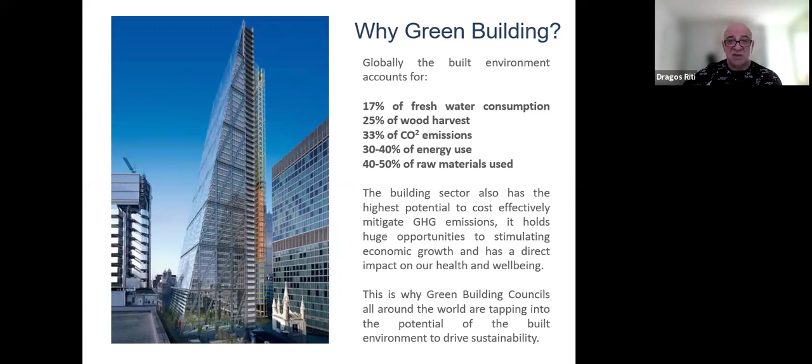So the learning objectives of this course, I was saying just before, is to establish the relationship between the demands of sustainability and the resource we are using in construction. This is what is really needed to build something in a way that we can have a sustainable building.

A sustainable building meaning less CO2 emissions, a building that can use free energy or green energy, and also a building that can recycle water, but also a building that is built in a manner that it can hold thermal energy, not losing due to the construction techniques energy outside of the building.

Also, we will be looking at understanding the environmental impact of materials used in construction. In order to have materials to use in construction, we need to take raw materials from the lithosphere, and that creates an impact on the environment. But not only that—at the end of the construction cycle there's also a lot of materials or debris that are thrown back into the environment.

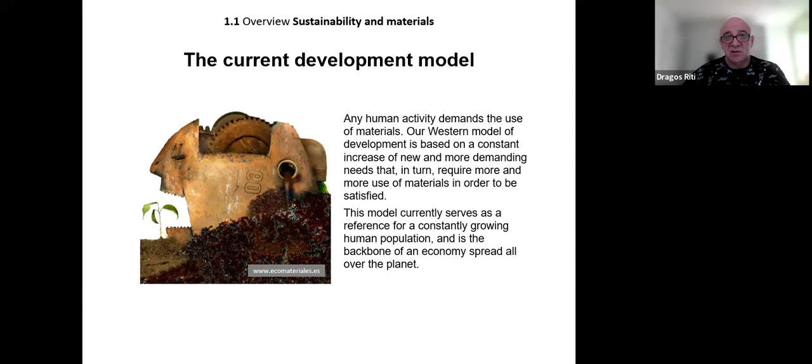We're all aware of part of this. The problem with the current model is that materials are extracted from nature, causing environmental impacts associated with this extraction, and that diminishes the reserves. We don't have too many reserves left for the next 20, 30, or 50 years. And once the use of products has been exhausted—after using a cell phone for 5 years or 2 years or 7 years—the materials return to the environment as waste, often causing serious contamination problems. This procedure works against a long-term development model. Therefore, it is necessary to create a model that is sustainable.

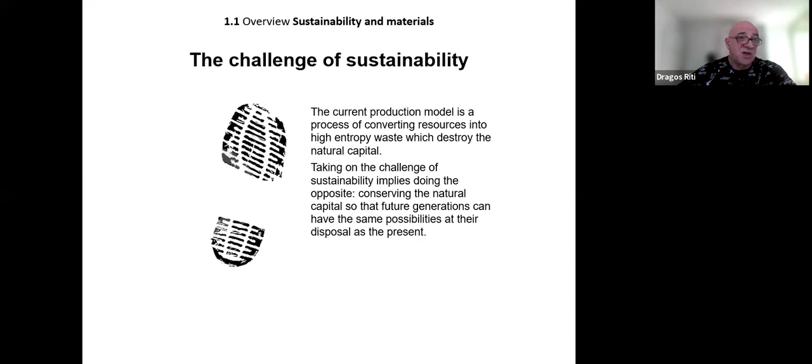The question is, how can we do that? Where is the place we can change something or do something different? This is the challenge of sustainability. The current production model is a process of converting resources into high entropy waste, which destroys the natural capital. Taking on the challenge of sustainability implies doing exactly the opposite: conserving the natural capital so the next generation can have the same possibilities at their disposal as we have now in the present.

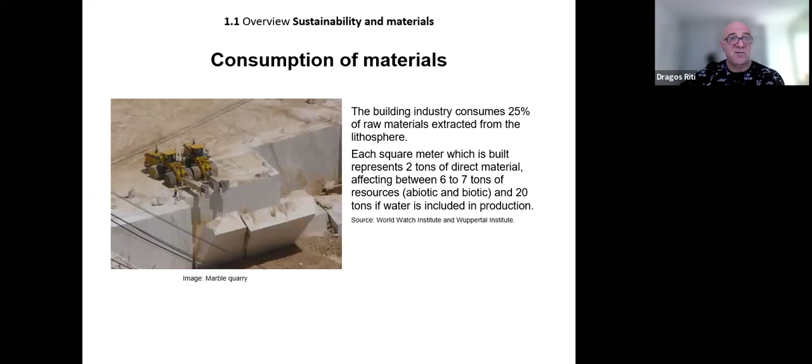And if you think about it, this is huge. The construction industry is also generating waste, and construction waste usually makes up around 33% of the total amount generated by society. We're accountable for 5.2 tons per person per year, and domestic waste is up to 8.5%—that's 1.3 tons per year per person.

On average, 60% of construction waste is recycled, which is quite a high number compared to 20% of domestic waste. Basically, we're not recycling our waste, but only a very, very small portion.

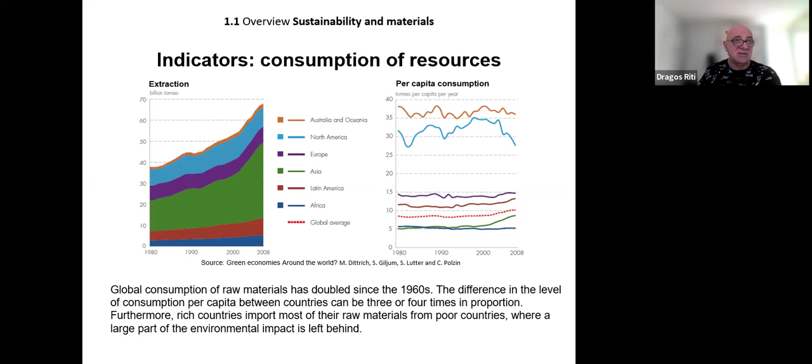Poor countries do not really have policies to protect the environment, and they're also in need of money to make their economy grow. So the environment is one of the last things that they're looking at.

Now, talking about resources and materials—I don't know if you know, but a few years ago there was this discussion that we would come to a point of no return, in the sense that we are using more resources from the lithosphere than the lithosphere can naturally regenerate.

So the raw material reserves pose limitation to the use of materials and the quantities which can be used. Unfortunately, we're not aware, or not really conscious, that each action we're doing - when we're buying construction materials, when we're building something - has an impact on the lithosphere.

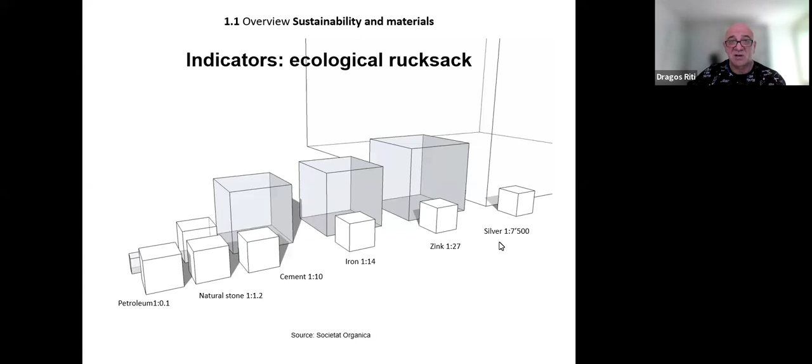The ecological backpack represents the raw materials necessary to manufacture a certain amount of material or product. I was giving the example of mobile phones - a mobile phone weighing 150 grams can have an ecological backpack of up to 75 kilograms. And a 6 kilo computer can have something like 1.5 tons of raw materials in order to have it in our home. Here you have some other examples of the ecological backpack.

Aluminum is 1 to 6. Steel is 1 to 15. And you'll see that in order to get 1 gram of gold, you will need 350,000 grams of raw materials to have it in place.

There's also associated with the extraction of raw materials, in order to convert them into finished products or finished materials, a number of technologies, but also a number of substances used in order to put these things together, and this is providing a toxic environment. So we're poisoning, in a way, the lithosphere by extracting or producing final products.

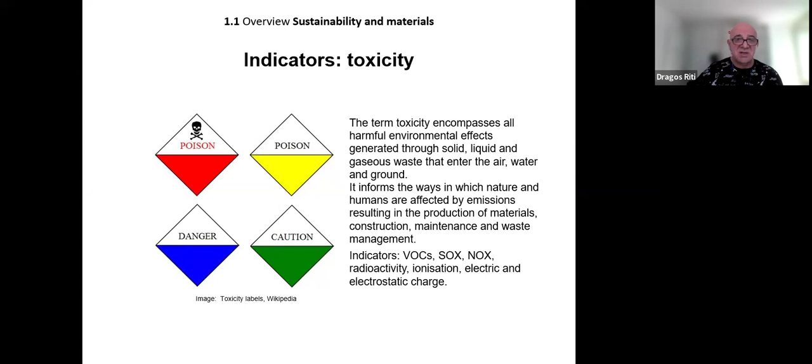These indicators are volatile organic compounds, and some others are radioactivity, ionization, electric and electrostatic charge. And also, by mining and manufacturing final products used in the construction industry, we are producing gases, carbon dioxide.

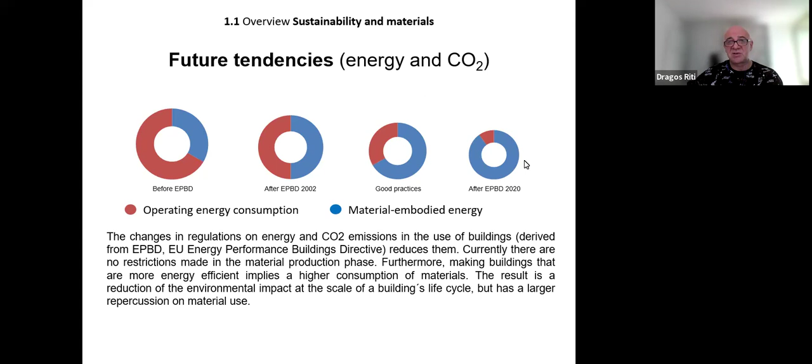So how do we look at the building? A building is put together, of course, using materials, but it's not only the materials that are accountable for how to build a building, or the extraction of materials, or the energy needed to provide these materials. It's also the philosophy and the concept on how we are building today. So what we need is a holistic vision on this construction industry.

We need to look at materials and building systems, how we design them, how we put them together. We need to look also at the industrial system. We need to look also at the commercial system, how we are selling the buildings and what we're putting in the building. And of course, when we have the building ready, we need to have a smarter management of sustainable building. And that implies touching several aspects of the industry.

The first one is a redesign of the materials that we're using in the construction industry. That means we need to minimize the quantities, really using what's really necessary, to find solutions which have a low impact on the environment, and to try to use a standardized way of building. That means dry and retrievable joints. And of course, to look at the end of the life cycle of the building, how can we recycle material, or how we can tap into renewable options.

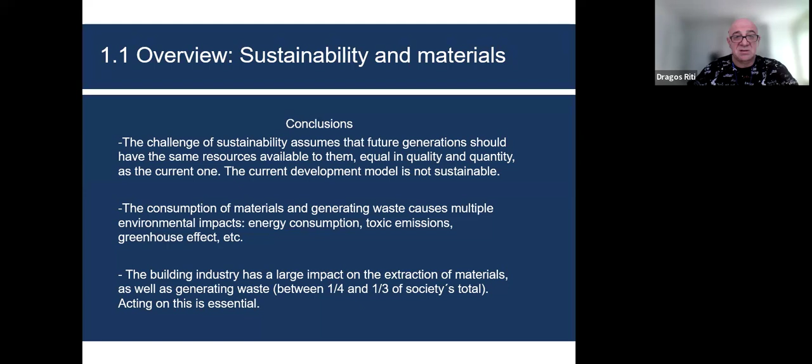Acting on this means finding ways of using a different development model for the construction industry. Looking back in history, we can examine the 20th and 21st century industry models.

The 20th century model was an open materials cycle, meaning extracting resources from the earth in a linear sequence: extracting, providing, manufacturing these materials, using them, and then they become waste. This is an open cycle.

This model has been largely used in the 20th century and is still used now. The more we find ways of closing this cycle, the more we can move towards an industrial ecology, inspired by the great biospheric recycling machine, which proposes closed material cycles. This is where 21st century society is aiming to go: recycling, manufacturing, using, and then recycling again. This is the closed materials cycle.

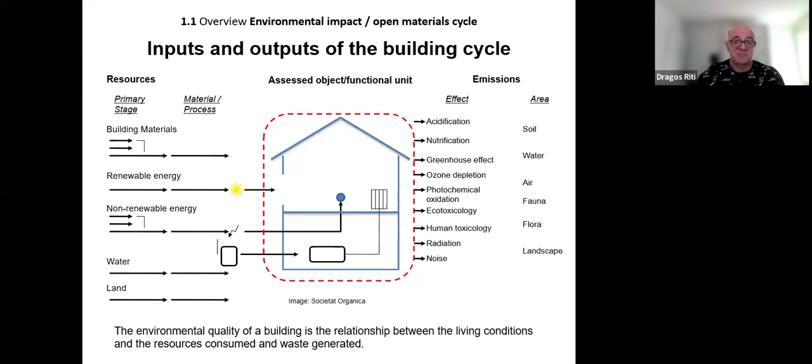The environmental quality of a building is the relationship between living conditions and the resources consumed and waste generated. So the quality of your living quarters is determined by the resources consumed and the waste this has generated.

In order to look sustainably at the way of building and construction energy, we need to tap into this concept called the life cycle of a building, the life cycle analysis. This chart shows this concept about input and output.

What we use as input are resources and energy. Using those, we need a lot of other things connected to energy and resources: we need to obtain materials and send them to industrial production, then distribute and sell them, and put them into use and operation. At the end of the life cycle, we have waste, a final disposal.

What do we do with this waste? We can recycle it or just dump it. At the end of the day, going throughout this whole life cycle, we have waste and emissions. Each stage of this journey—obtaining materials, manufacturing them, transporting them, putting them in use, and transforming them into waste—has an effect on the environment, coming from waste and emissions.

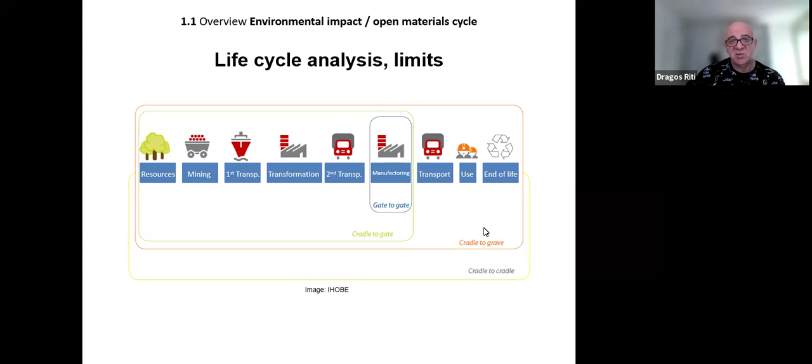In order to compare the results of two or more life cycles, the objectives, definition, and environmental inventories, the phases that we're considering, the limits of the system, the functional units must be the same when we're doing life cycle analysis. You will see further on how we can look at this kind of analysis of the life cycle of the material. So we need to define the goal and the scope of the materials.

It's also important to make an inventory, an analysis of the necessary materials that we are using, and not only materials, but also procedures, techniques, and systems, and also to see what is the impact, to be able to make an assessment of the impact that all these things we're using have on the environment.

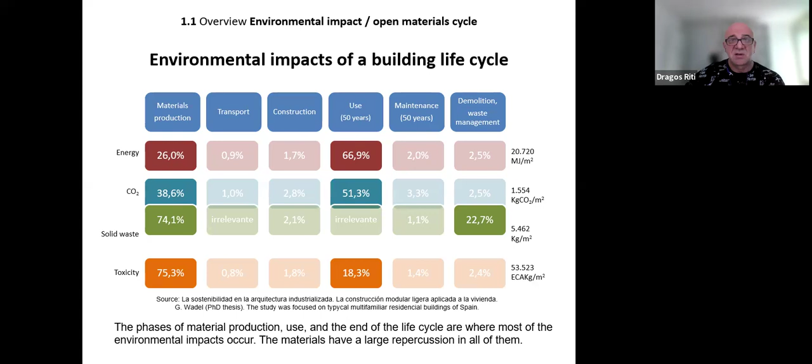The materials have a large repercussion in all of them. So where we really need to look in order to have a lower impact on the environment is during the materials production phase and also in the use of the building. And in order to do that, we need to look at how we're using materials and what kind of materials we're using.

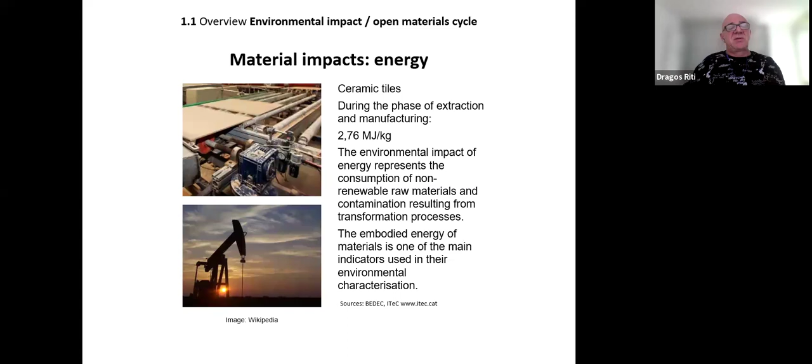So now, talking about the impact that materials have, we mentioned before the consumption of energy, water used, landfill. Here we have an example to give an idea of how this impacts the environment.

We're taking ceramic tiles as an example. Everybody uses ceramic tiles in their homes, and after a few years they're no longer in line with fashion, so we dump them, break them, and put in new ones. A ceramic tile, during the extraction and manufacturing phase, uses 2.76 megajoules per kilogram of material. The environmental impact of energy represents the consumption of non-renewable raw materials and the contamination resulting from the transformation process. The embodied energy of materials is one of the main indicators used in their environmental characterization, and that's what we want to talk about.

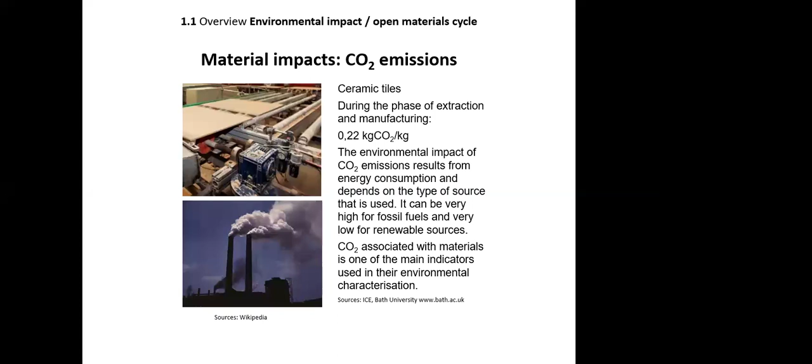Also, some other impacts include the emissions of carbon dioxide. Keeping the same example, ceramic tiles, during the extraction and manufacturing phase, release 0.22 kilograms of CO2 per kilogram of material into the atmosphere. The environmental impact of CO2 emissions results from energy consumption and depends on the type of source used; it can be very high for fossil fuels and very low for renewable energy. So depending on what kind of energy we use to manufacture these tiles, this has a lower or higher impact on the environment. CO2 associated with materials is one of the main indicators used in their environmental characterization.

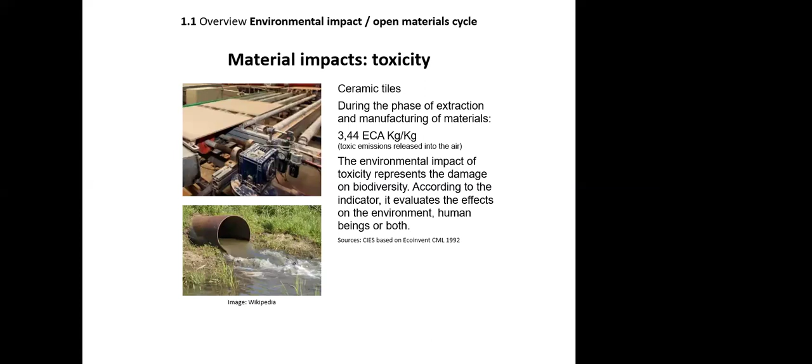Also, a big impact on the environment is toxicity. Again with the ceramic tiles, during extraction and manufacturing we have 3.44 ECA, which accounts for toxic emissions released in the air, so 3.44 ECA kilograms of emissions for a kilogram of finished product. The environmental impact of toxicity represents damage on biodiversity, and the indicator evaluates effects on the environment, on human beings, or both.

Of course, there are other impacts on the environment. Again with ceramic tiles, apart from energy, CO2, solid waste and toxicity, extraction and manufacturing of materials also cause water and earth acidification, ozone layer depletion, land erosion, eutrophication, acid rain, heavy metals pollution, land occupancy, and many more.

So what is the place and the scale? Here you can see the impact of the materials. The environmental impact of a specific material is closely linked to the rest of the building materials, which in turn form an important part of impacts throughout a building's life cycle.

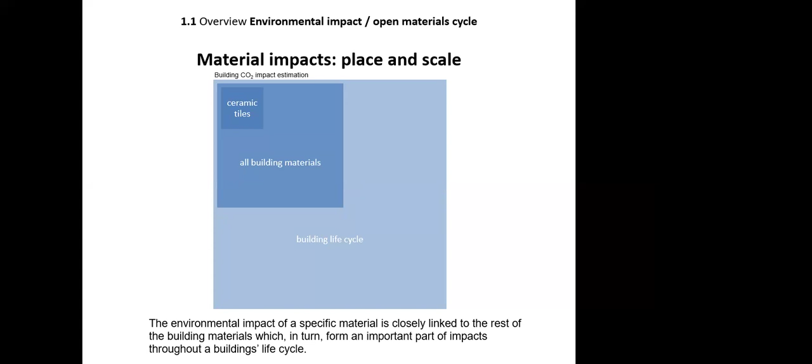So what are the conclusions of this short overview? The open material cycles, the extraction of resources, generating waste, are the causes of the environmental impacts of building products. These impacts arise from the extraction of raw materials, industrial processes of transformation, manufacturing, transportation, building maintenance, and disposal at the end of its lifespan. There are materials managed in an open cycle whose impacts can be smaller because they contain some environmental improvements, but they are a palliative, not a solution. The underlying problem remains.

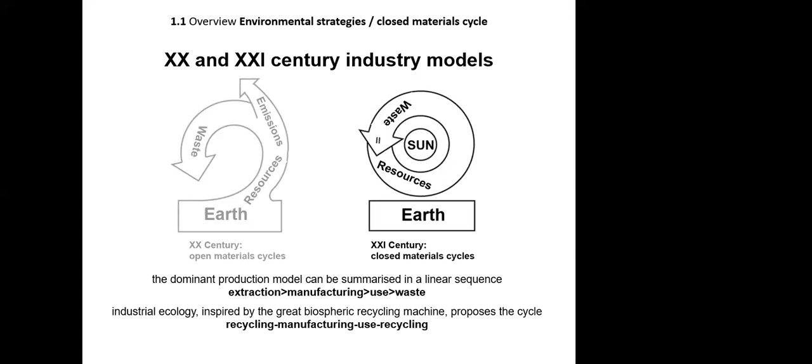Now, having been through the open material cycle, let's look at the closed material cycle and see the difference and what impact it has on the environment, if any. The dominant production model of the 20th century was extract, manufacture, use, waste. What we're looking at now in the 21st century is moving towards industrial ecology, inspired by the Great Biospheric Recycling Machine, which proposes recycling, manufacturing, use, and recycling again.

So we're looking at strategies to reduce impact on the environment in construction. There are 5 steps which are important milestones. The first is reduction of demand: it's important to look at how much we really need, and for that we need to optimize material use and reduce quantities per unit of service.

Also, when looking at materials, we need to try to increase efficiency, selecting materials with the same characteristics but lower impact on the environment. For that, we also need to look locally, use local resources, and build by reusing materials closer to the construction site, not bringing materials from hundreds or thousands of kilometers away.

And of course, a big and hot topic today is the recycling or renewal of materials: using recycled industrial materials or renewable natural materials. That would help a lot to significantly reduce the impact on the environment. We also need to look at impact neutralization or compensation, by choosing products that compensate their own impacts, known as carbon neutral. These are the 5 strategies we can use to have a lower impact on the environment.

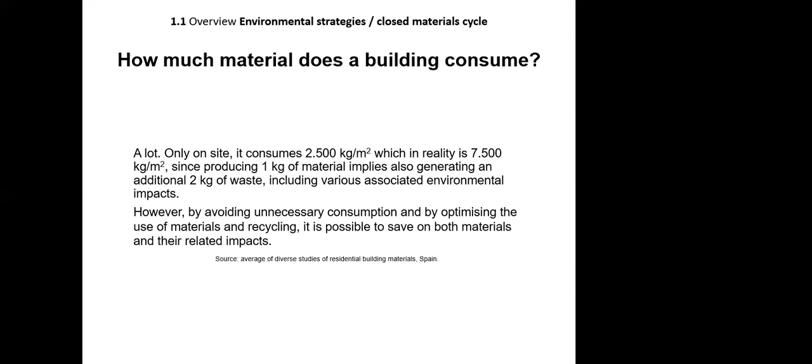Again, how much material does a building consume? Like we said at the beginning, a lot. Only on site, it consumes 2.5 tons per square meter built, which in reality is 7.5 tons, since producing a kilogram of materials also implies generating an additional 2 kilograms of waste, including various associated environmental impacts. However, by avoiding unnecessary consumption and optimizing the use of materials and recycling, it is possible to save on both materials and their related impacts. This is, in my opinion, one of the best examples: the demand reduction.

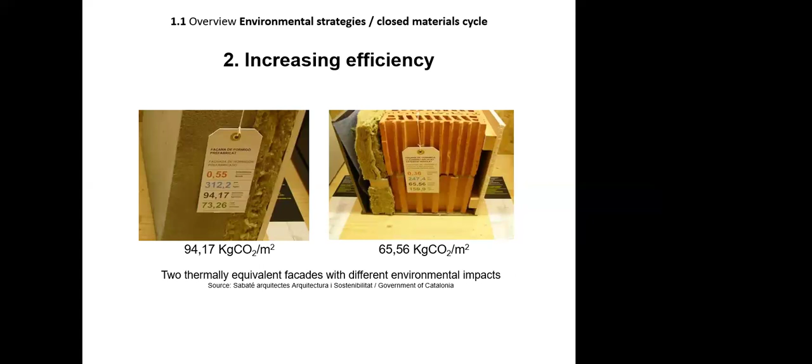So the understanding, the vision of the designer, and the knowledge of the designer can, from the beginning of the development of a building, have a significant and lower impact on the environment. I think this is a must—to have architects with that kind of vision.

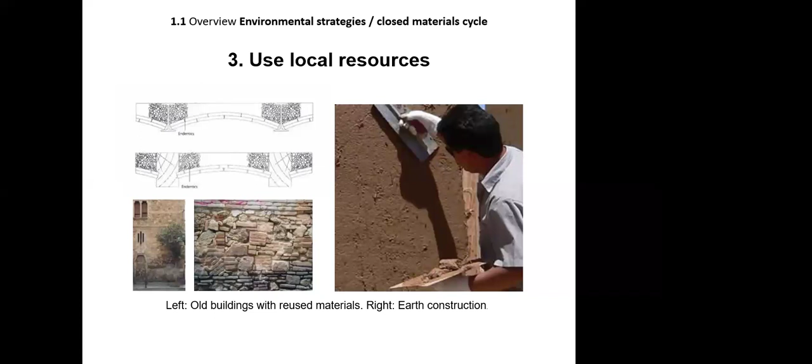We also need to look at how we use local resources, using available materials on site rather than bringing them from far away or paying for expensive materials. We can use local resources like wood, stone, or even earth. Here you have an example of old buildings refurbished with reused materials on the left, and on the right, an earth construction building.

Recycling and renewal - this is important. We're talking about recycling when using industrial materials such as iron. Here's how we look at iron: we use raw materials - iron ore, limestone, coal - which go through a process of preparation at sinter plants and coke ovens, then to iron making using an integrated steel making process with a blast furnace or basic oxygen furnace.

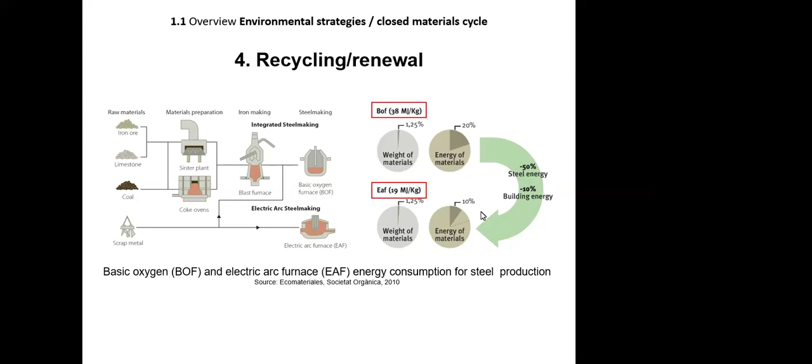So how can we recycle materials? How can we look at recycling materials? I mentioned before there are two kinds of recyclable materials: the infra-recyclable and the 100% recyclable materials. Here's an example of two: the infra-recycling material, which is concrete - we can transform it into aggregate for blocks instead of using natural stone. You can use approximately 30 to 40% crushed concrete instead of stone, mixed with cement, to make concrete.

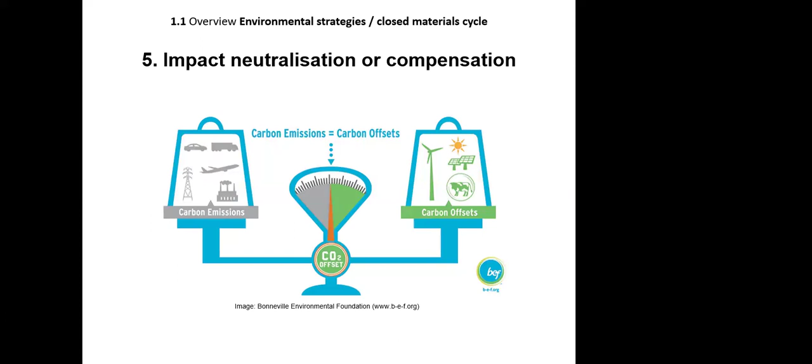An example of a 100% recyclable material is aluminum, which can be transformed into new aluminum for frames by recycling. We're also talking about impact neutralization or compensation. How can we compensate or neutralize CO2 emissions? By using biofuel, photovoltaic panels, or wind energy. In this way, we can offset carbon emissions.

What are the actions to minimize material impact? We need to decrease the demand, and we can do that through the design of a building that decreases material demand. Going back to design - architects, designers, structural designers, equipment designers - they are the gateway toward this lower impact on the environment.

Design of a building that decreases the generation of waste. For that, a designer can design a building with joints that allow it to be deconstructed instead of being dismantled or demolished, and reused in different places or ways. Design of a building that can be deconstructed, reused, and recycled - I was just talking about that.

Have an efficient user manual for the building. This is so important because during the lifetime and usage of the building, we need to operate and maintain it.

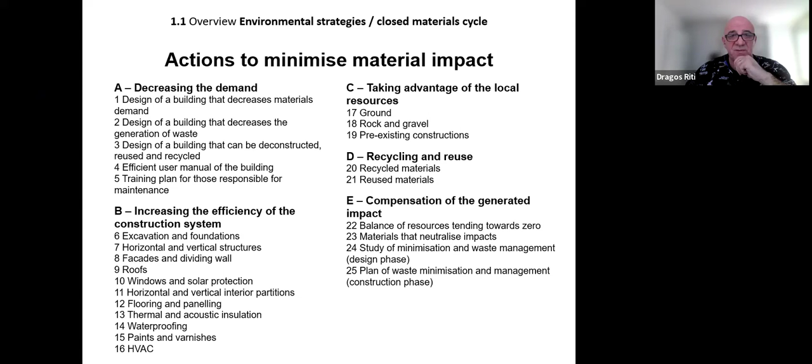Or we can use industrially manufactured structures, already prefabricated, brought to the site. We have a lighter structure using recycled or renewable materials instead of building on-site elements or joints. We can have them prefabricated and transported to site and just assembled. Also, using double functioning walls, structure and envelope, and using recycled or renewable materials can help in this respect.

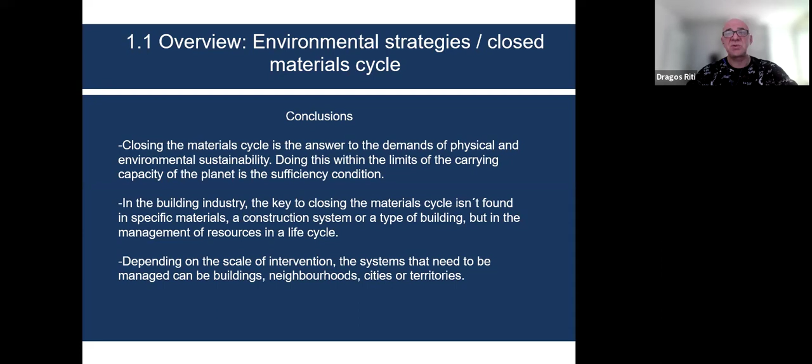Now we will go into a different section, which might be of interest for you or might not, and we will look into rating tools. I'm sure you know about those rating tools, most common in building and construction industry. We're talking about the green labels that we can obtain based on an assessment done by a third party, which gives us the sustainability image of a building. But there are also other rating tools. We will go briefly through them.

So we will start from materials. What are the requirements for sustainable materials? We need to look at the checklist, and the first things to look at are low primary energy and low primary emissions. That means natural production, and that means recycled materials.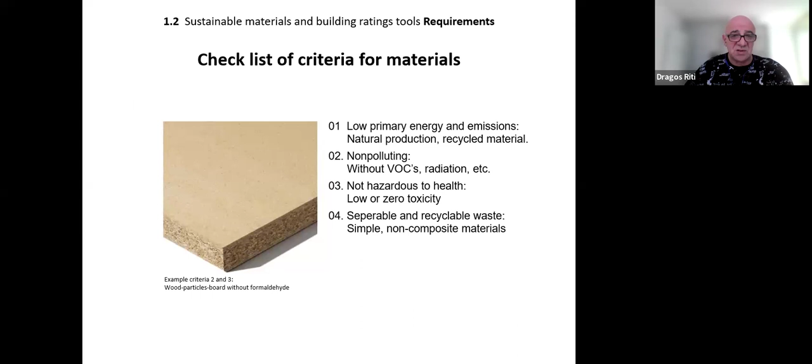Another criteria would be that the material should be non-polluting, without volatile organic compounds, without emission of radiation, gases, etc. Materials that are not hazardous to health, which have low or, if possible, zero toxicity. And another criteria, which I mentioned several times, is separable and recyclable waste, simple and non-composite materials. Here in this picture, you have an example of wood particle boards which are assembled without formaldehyde, a chemical highly and extensively used to produce wood particle boards.

Another criteria is to look at the product when we buy it, if it comes with environmental certification — this is the Eco Label 1 to 3. If we can use materials with removable joints that can be dismantled, dry assembled, or deconstructed. Also looking at materials which are made with recycled materials and have residue that can serve as raw material for other materials to be recycled. And of course, materials, joints or systems that can be reusable, have a long lifespan, and can be modular.

Another criteria is to save energy when producing and using the materials through inertia or thermal insulation, and of course saving water. We can do that by collecting rainwater and reusing it in different ways with the help of different systems for toilets, gray water, or for soil percolation, irrigation, or other things.

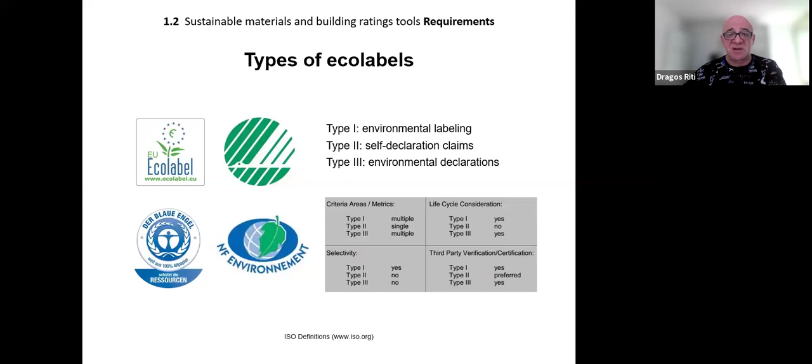Type 1 and type 3 have third-party verification certification. Type 2 is more of a self-declaration certification claim.

You have here another example: this is the EU Type 1 Eco Label. When developing EU Eco Label criteria for products, the focus is on the stages where the product has the highest environmental impact, and this can differ from one product to the other. If we look at textiles, for example, fabrics have strong environmental impact when they are dyed, printed, and bleached. For this reason, experts have come up with criteria for textiles to make sure harm at the manufacturing stage is reduced as much as possible.

For each individual material, environmental requirements can be determined that ensure low environmental impact during manufacturing, but also throughout its life cycle.

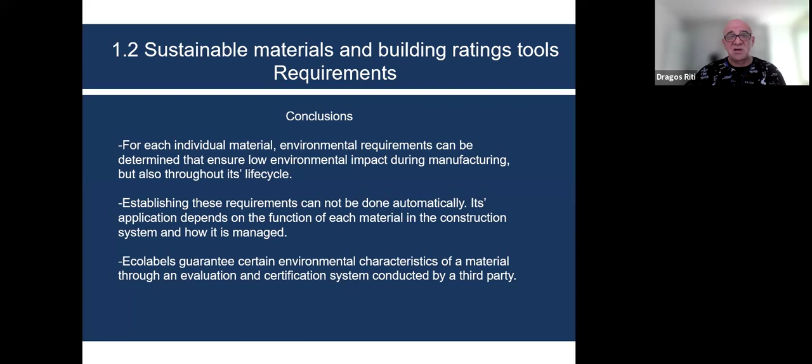Establishing these requirements cannot be done automatically. Its application depends on the function of each material in the construction system and how it is managed. Eco labels guarantee a certain environmental characteristic of a material through an evaluation and certification system conducted by a third party. But an eco label does not give you everything. It certainly helps, but we need to do more than only buying products with an eco label.

What would be the first steps? What to do? It's the initial characterization of the materials, and we need to look at the origin and the type of raw materials, the manufacturing process that is used, the differences with respect to the alternative. So what alternative can we use for this kind of material or product?

Also, another place to look at is how can we define an equivalent functional unit. That means determining the surface area, the building envelope, etc., with defined performance characteristics. What do we want to achieve, in other words?

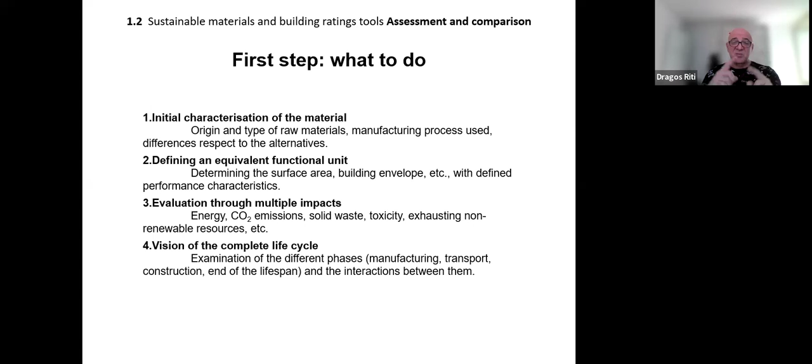Then do an evaluation through multiple impacts. What impact does that have on the energy, on the CO2 emissions, on the solid waste, the toxicity, and the exhausting of non-renewable resources? Coming back again to the whole philosophy, the holistic approach is to have a vision of the complete life cycle of the materials. For that, we need examination of the different phases: the manufacturing, the transport, the construction, and the end of the lifespan, and of course the interaction between all these materials.

And here we have, I think this is the simplest study case, the example of a modular curtain wall. This is coming from the Technical University of Catalonia in Spain, where they wanted to change the curtain wall of a building in order to have better energy performance. You will see what they have done, what solutions they applied by assessing different materials and different ways of putting these materials together in order to have better energy efficiency.

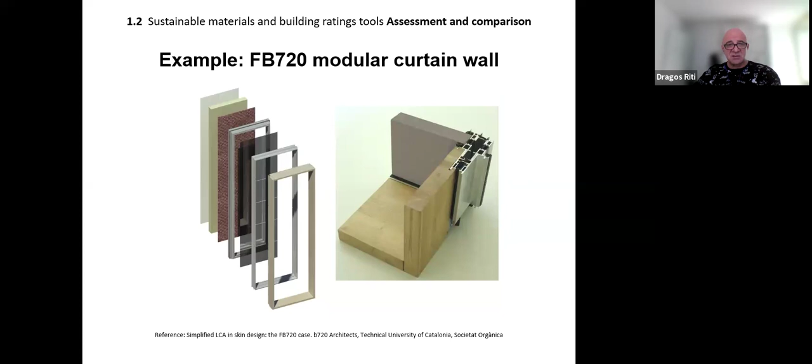So this was a modular curtain wall, and this was the section, the elements it was manufactured from. It was called the FB720.

And for that, they made some considerations. They made the facade analysis from the environmental point of view, looking at energy, CO2 emission, waste, toxicity on the material composition, and also at the thermal performance and the lighting scheme of the facade.

And the question was, how should the facade be composed? How should a curtain wall facade be composed? Starting from there, they made a comparison framework.

They looked into four directions. They had a developed wall and a reference wall in order to be able to assess the new proposed solutions.

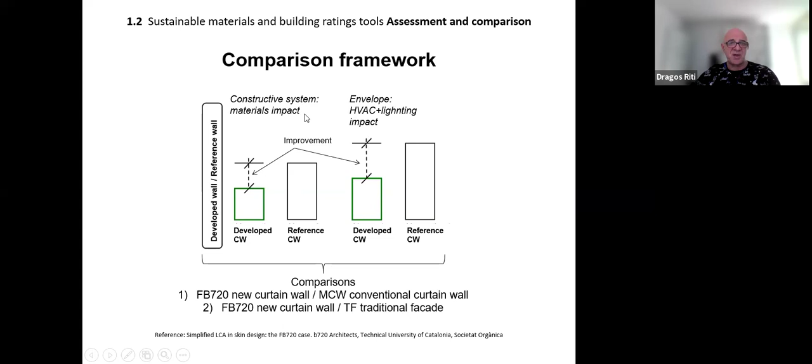The FB new curtain wall against a conventional curtain wall, and also against a traditional facade. This is the reference, this is the new developed one, and this is also a new developed one, and the impact that had on the HVAC and the lighting system, and also the impact it had on the materials. So they considered a few scenarios.

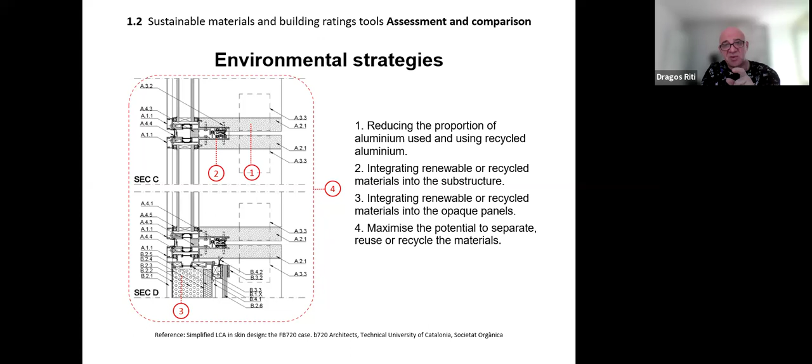Another strategy was integrating renewable or recycled materials into the substructure, then integrating renewable or recycled materials into the opaque panels, and of course maximizing the potential to separate, reuse, or recycle the materials.

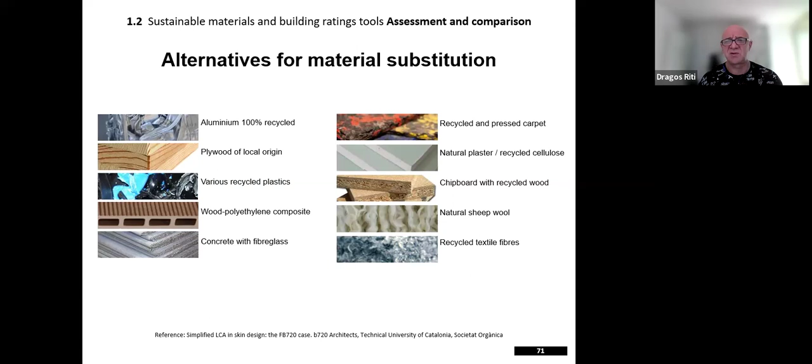The alternative considered for material substitution was to use 100% recycled aluminum, plywood of local origin, various recycled plastics, wood polyethylene composite, or concrete with fiberglass. Also, they were looking at recycled and pressed carpets, natural plaster, chipboard with recycled wood, natural sheep wool, and recycled textile fibers.

And after doing the analysis on each type of material, we have here an analysis of four types of mix of elements and composites to build this facade: the structure, the opaque enclosure, and the transparent enclosures.

For each one, we have the 4 types of elements that have been used: A, B, C, and D. In type A, they've been using aluminum in structure, timber, steel, EPDM. On the enclosure was wood board, sheep wool, kraft paper, exterior insulation, aluminum fittings and fastener steel, and sealing and joints. The transparent enclosures use double glasses with sun control and a metal framing of the glasses.

Type B, the biggest change, is using PVC instead of timber. Type C is using a plastic, and type D is using a concrete reinforcement for the primary profiles. Other differences can be seen at the opaque enclosures, where we have plasterboard instead of wood boards, recycled fibers instead of sheep wool, and also most of them are using kraft paper.

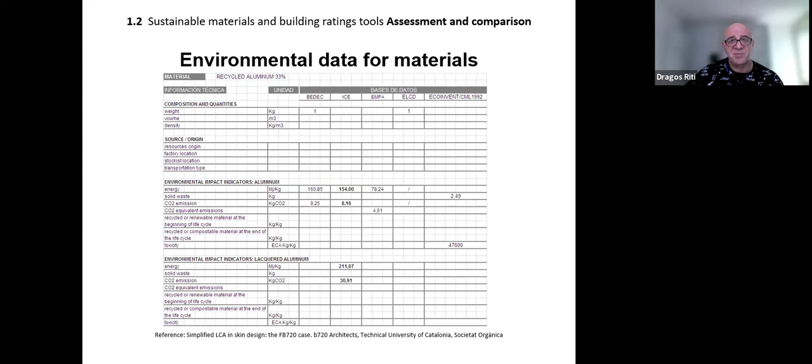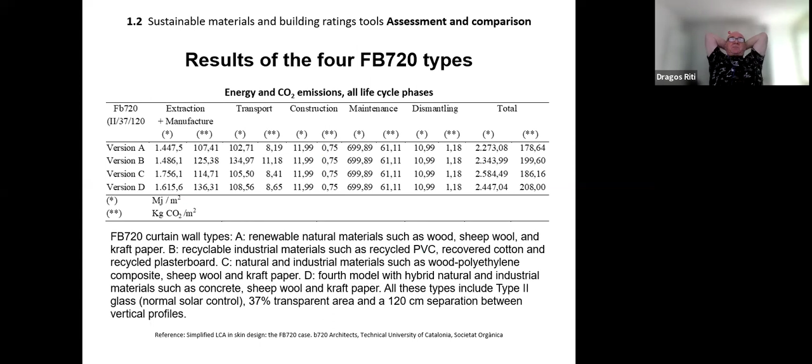After doing the analysis on the 4 types of facade, they came up with these results, which are quite interesting looking at them. As you can see, facade 720A...

The assessment has been made during the manufacture, during the construction, during the maintenance, the dismantling, and a total of points for each type of them.

Manufacture: kilos on square meters waste from the manufacture of basic materials. Construction: waste from packaging and surplus construction material. Maintenance is non-recyclable waste due to partial replacement of the wall at 35 years. Dismantling is non-recyclable waste due to dismantling or demolition of the wall at 50 years, which is the end of the life cycle of the building.

The charts provide a clearer idea of the impact of each phase on the total waste in each case, as well as a relative comparison between the various facade systems. The lowest values, with a variation up to 40% due mainly to the manufacture phase, correspond to the different versions of the FB720 facade. As you can see, the A version has the best scoring.

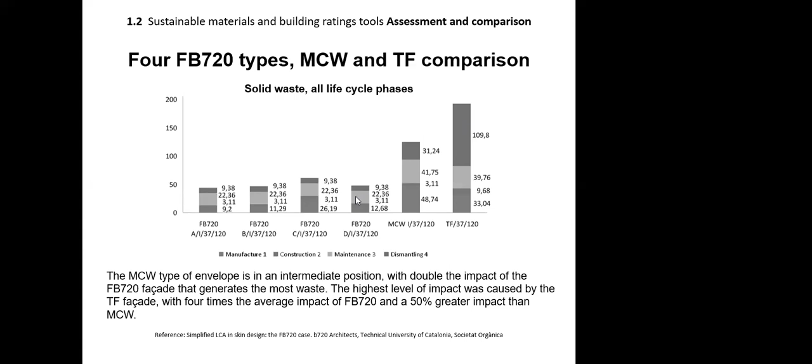And you have them here - this is the solid waste throughout the whole life cycle phases. These are the 720 facade, the different versions of the 720, the masonry, and the traditional facade.

An additional impact reduction for the 720A type combines positive impacts on various possible improvements. Some improvements made were the replacement of aluminum frames with wood, saving 65 megajoules per square meter, close to a 3% saving.

Another improvement was locating the facade workshop close to the building site, no more than 75 kilometers away, instead of bringing them from a longer distance. Reusable packaging and recyclable materials were used, where the most impact has the useful life of the joint extended to 50 years, and also using glass panels that can be totally dismantled. With these additional measures, they gain another close to 35% savings on energy.

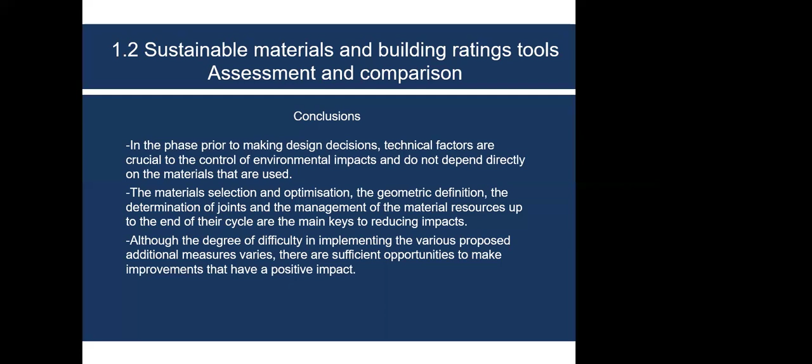So we were talking about certification tools, and you probably know that for many years there have been a number of green certification tools for buildings, which assess a number of parameters from the design phase until the end of the life cycle of the building, some of them in order to give an impression of how sustainable the building is.

And we have different types, different levels of certification. On level 1, the most known certification level, which applies specifically to buildings, we have the LEED, the BREEAM, the DGNB, HQE. These are applied to the building because they're doing a multi-impact analysis throughout the whole life cycle of the building.

Then we have a different type of certification tool like the EU Eco Label, which has a multi-impact analysis but analyzes only one life cycle aspect. Then we have level 3, which does one impact analysis on one life cycle. And then we have level 4. In this category is the energy performance certificate, which is one impact analysis over one life cycle phase.

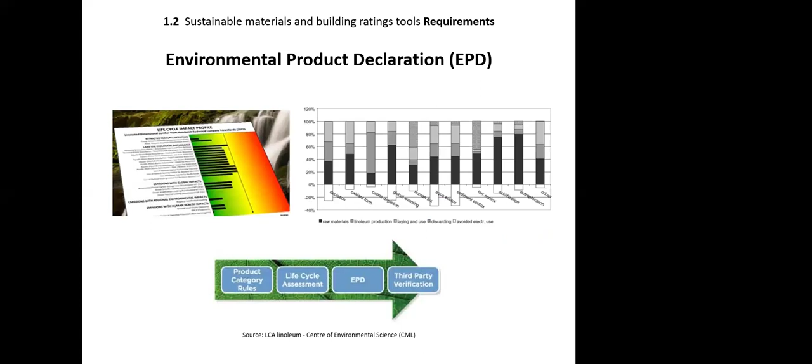And of course we have the environmental product declaration, the EPD, which relates to the product category rules, doing a life cycle assessment. Then we have this EPD, which goes to a third-party verification.

But what is really something to look at is the main certification systems that are present and used in the construction industry. The most well-known are the LEED certification tool, developed by the US Green Building Council in the United States, or the BREEAM, which has been developed in the UK. We also have the DGNB, developed in Germany.

We have the HQE developed in France, and Verde developed in Spain. So these are the main ones used throughout the world. Some of them are applicable only locally, and some have a wider range of application, geographically but also in specific sectors of the building industry.

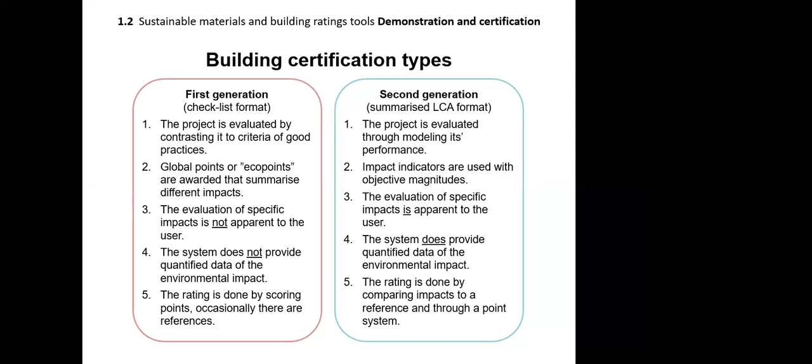And here we have the LEED - it's one of the most known certification tools.

It has been brought to the market in 2000, and it's doing an evaluation of the quality. It gives you impact categories such as site, water, energy and atmosphere, materials and resources, and it can be applied to the phases of design, construction, renovation, and management.

This is a type 1 generation tool, and it's a checklist of criteria that does not provide impact values. It can be used on residential, tertiary, interiors, distribution hubs, neighborhoods, new buildings or renovation. It's doing a qualitative evaluation of materials without quantities, and the impact on total value is about 13%. The criteria looked at are waste management, reuse of materials, recycled content, regional origin, quickly renewable impact, and certified wood.

Here is the criteria and the performance they're looking at. For waste management, they look at separation of elements and delivery to recyclers. Reuse of materials is the possible reuse of structural and envelope components. Recycled content is materials that impact the budget. Regional origin looks at factories at a distance to the site no farther than 800 kilometers. Quickly renewable looks at wood and plant fibers in general, especially wood certification like FSC and others.

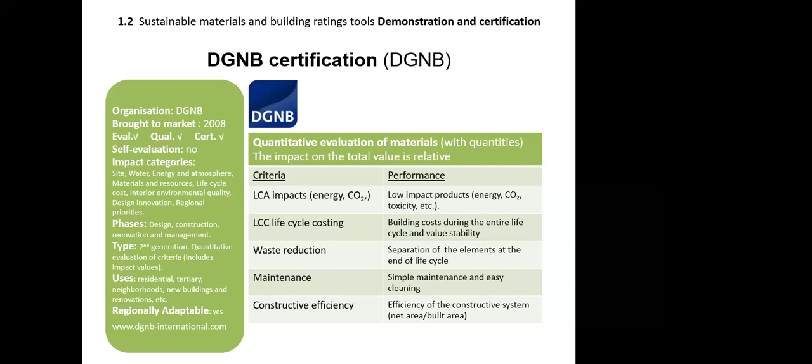This is a factor, a percentage that most developers are looking at - what is the percentage of net area compared to the built area. Usually in residential buildings, this percentage is around 60 to 70% in best cases. In office buildings, you're around 80 to 85% for an efficient building. And in industrial and logistics, you can go up to 90 to 95% net area or usable area compared to the built area.

The HQE certification is a French tool. It has been brought to market in 2003. It's a self-evaluation tool, but it's not for certification - though there are self-assessment tools available. It has impact categories in construction, site, water, energy, like all the others, and can also be used in different phases like design, construction, renovation, in-use stages, and management.

This is also a second generation certification, and it can be used in homes, non-residential, new and existing buildings, and renovation. The criteria include the impacts of products on building, waste, local production, biosourced product, certified wood, and recyclability. The impact of products on building favors low impact products - meaning lower energy, emission of carbon dioxide and toxicity, use of certified products, consideration of impacts and EPDs from 50% to 100% of products on global building impact and calculation of the assessment.

They also look at waste management, and at optimizing transport of renewable materials, as well as the minimum quantity of biosourced materials. They also look at wood certification, integration of a specific minimum volume of wood, and implementing materials and products enabling carbon dioxide to be trapped. Recyclability also covers the removability and separability of construction products and processes with a view to optimal environmental management of their end of life.

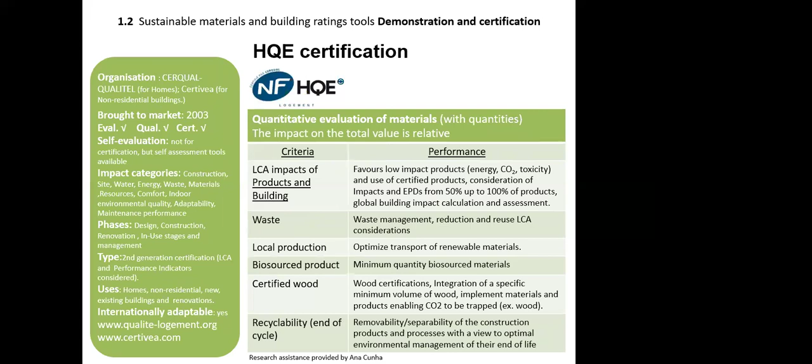These are the certification tools for buildings, and depending on the preference of the developer or the user, they might use one or another certification tool. Each one has different scoring points, which give you the impact or reduced impact of the building according to the certification points that we get.

If I remember well, BREEAM has good, very good, excellent, and outstanding criteria or certification labels, and LEED has certified, silver, gold, and platinum. These are the labels that a building can get after a certification based on the assessment made with these tools.

The EPD describes the main environmental impacts of a product in a standardized way, but it does not guarantee that this impact is low. So we can show you the numbers, but that doesn't mean it would be low.

The evaluation system and environmental certification of buildings analyze the life cycle of the building in a simplified way, and multiple effects of the various phases are evaluated, providing an overall rating. Second generation systems quantify environmental impacts in conventional units of measurement, and compared to a conventional system, they also inform about impacts that are avoided.

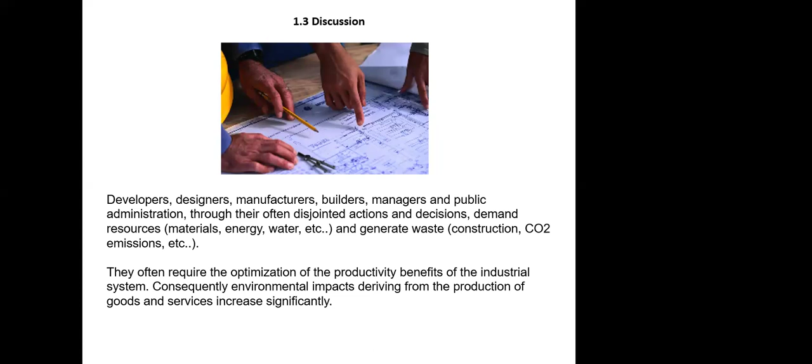Usually this is a difficult conversation, but it can be done if we bring everybody to the table and lay down the needs present in society and in each sector.

In this discussion, the urban planner has an extremely important role. We're looking at preserving the territory, reducing mobility needs, and freezing the growth of the urban footprint — not taking more land than necessary to develop a building.

For the developer, it's about trying to find alternatives that respond to unmet housing needs without increasing building stock and consuming natural areas. For the designer, it's a must to design processes capable of drastically reducing the consumption of energy, water, and materials, as well as the generation of waste.

For manufacturers of materials, the goal is to offer products that close the material cycle, using renewable or recyclable materials. For builders and other technicians, we need structures and training tailored for renovation of the building stock — renovation being a place to look, if possible, instead of developing new buildings using new stocks of materials.

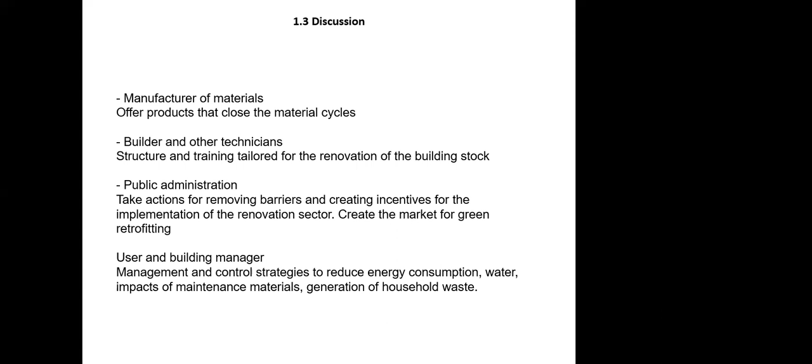Of course, it's also important to look at the user and the building manager: management and control strategies to reduce energy consumption, water impacts, maintenance material, and generation of household waste. So this was basically the discussion about the certification tool.

We will now look at the second part. Hopefully we'll have enough time. Yes, we do. We will be looking at closing the material cycle, looking at nature-based materials and industrial-based materials. I don't know if there are any questions until now, but if there are, Elena, you can send them to me. If not, I will keep going on. Okay, beautiful, thank you so much. I hope everybody's still awake here.

So, talking about the standard production model, we were saying that this is a problem, and we addressed that in the beginning. The manufacturing of almost all industrialized products, including the most innovative ones, follows a sophisticated linear production system based on the same sequence: extraction, manufacturing, and waste. From an environmental point of view, this model still has the same negative characteristics since its creation during the first industrial revolution. So this model is inherited from the industrial revolution, and we have kept it going until now.

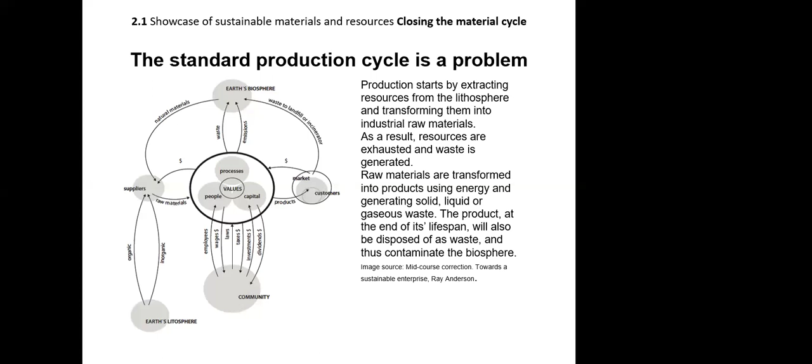Another production model can be the solution. This new production model needs to look at closing the material cycle and the reconversion of waste back into resources. This must be included in our industrial model to face the challenge of sustainability. In order to do so, renewable material can be used by letting nature do the recycling, or materials can be recycled industrially. In both cases, the future strategies lie in finding which is the most adequate option, case by case.

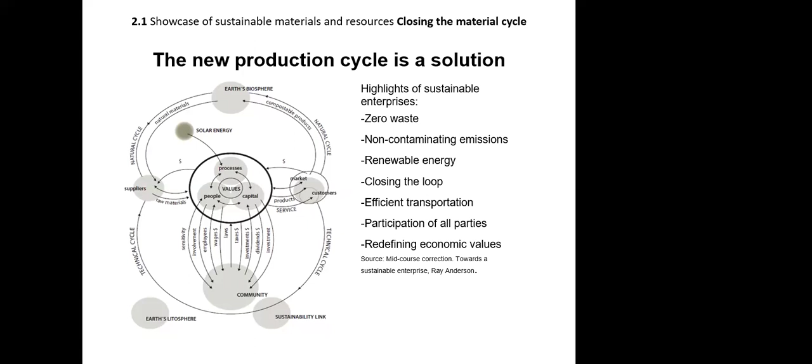The new production cycle is a solution because it highlights sustainable enterprise practices such as zero waste, non-contamination, reduced emissions, renewable energy, and closing the loop. We also have efficient transportation, involving all parties to participate in this cycle, and redefining economical values.

There are two ways to close the materials cycle. The first one is to use the biosphere as the great machine, able to gather waste and turn it into resources by means of its own natural processes. This is the path of renewable materials. The second path is to follow the technical system, by organizing adequate waste management, designing recycling processes, and turning waste again into resources. This is the path of non-renewable materials, the path of recyclable materials.

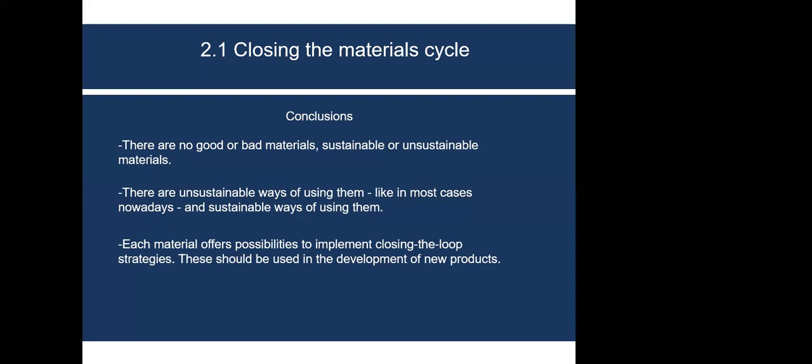There are no good or bad materials, sustainable or unsustainable. There are only unsustainable ways of using them, like in most cases nowadays, and sustainable ways of using them. Each material offers possibilities to implement closing-the-loop strategies, and this should be used in the development of new products. If we're looking at closing the cycle through the biosphere, timber and wood, together with plant and animal fiber tissues, constituted the basic resources for most civilizations prior to the Industrial Revolution. Such materials, when their use is depleted, can be returned into the natural environment that produced them, and after being naturally processed, transformed again into the original resource. We have here the example of cork.

Cork can be extracted from the cork oak without putting its life at risk. This process starts 25 years after it is planted and can be repeated every 9 to 12 years. A tree grown by traditional methods commonly reaches a productive life of 2 centuries without any artificial irrigation, using neither herbicides nor fertilizers. Currently, the planted cork oak takes up an area of 2.2 million hectares, mainly located in Spain and Portugal.

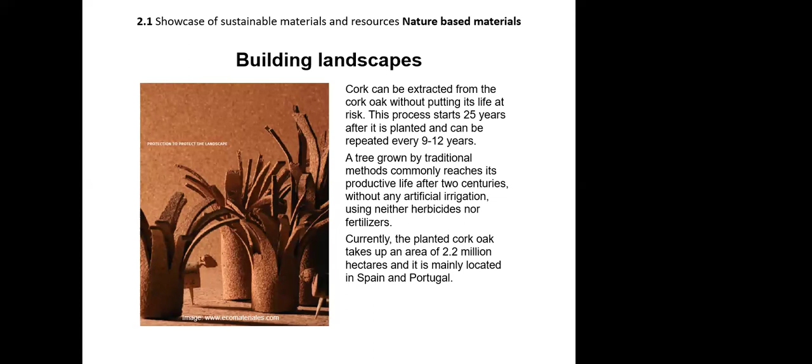A cork oak forest is more than just a cork harvesting field, since the natural activity of these trees becomes indispensable in maintaining the ecosystem balance of the arid place they inhabit. By using cork insulation or finishing, we are opting for a renewable and low energy content material, ensuring the continuity of its production and the subsequent natural landscape preservation.

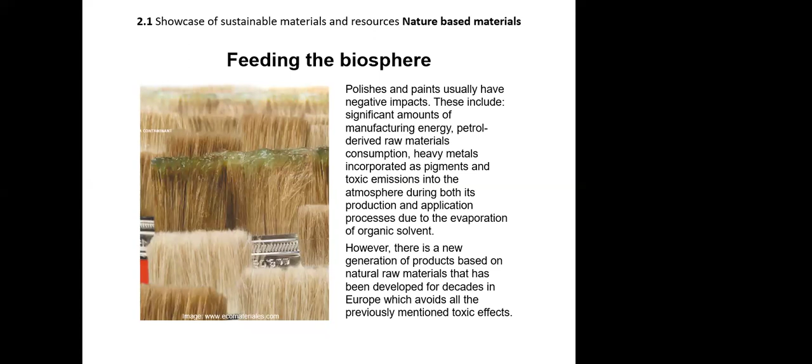Polishes and paints usually have negative impacts. That includes a significant amount of manufacturing energy, petrol-derived raw materials consumption, and heavy metals incorporated as pigments, which have toxic emissions into the atmosphere during both the production phase and the application process due to evaporation of organic solvents. However, there is a new generation of products based on natural raw materials that has been developed for decades in Europe, which avoids all these toxic effects.

Natural polishes and paints are products whose finish and durability qualities are equal to those of synthetic origin. Their use drastically reduces environmental impacts, as minimum amounts of energy are employed in their manufacturing process compared to paints based on organic solvents.

Raw materials derived from plants are used, which are renewable and free of heavy metals. Only minerals or oxides from minerals are used as pigments. The release of organic volatile components into the air is smaller, and all waste is biodegradable and returned to the natural environment to be composted, because most lacquers and paints now use organic components and are based on water solvents, not synthetic solvents.

Talking about the natural environment, I don't know how it is in Ukraine or in other parts of the world, but in Romania and globally, there is a big issue with deforestation.

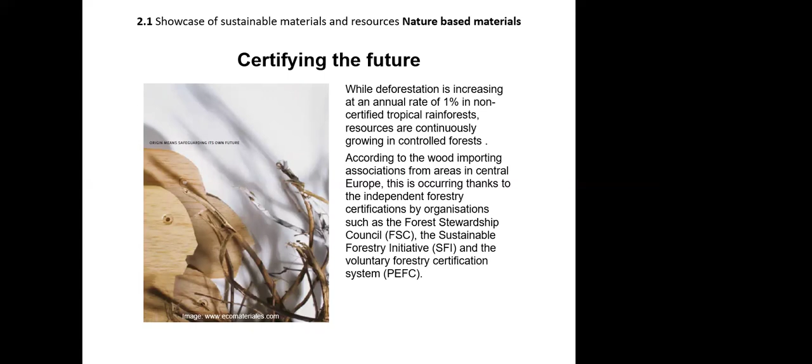A certified system assesses forestry practices in accordance with previously established regulations and makes it possible for forest management to meet environmental, social, and economic parameters, ensuring durable health and productivity of the forest. Moreover, wildlife habitat, water quality, and social benefits for the community, such as proper and regular work, are ensured in these forests.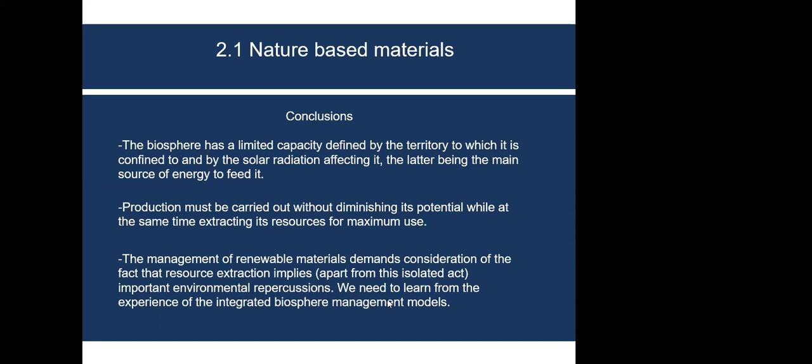It's good that we're cutting forest, but it's even better if we are replanting what we have been cutting, and maybe even more than what we have been cutting. Because the biosphere has a limited capacity, defined by the territory to which it is confined and by the solar radiation affecting it, the latter being the main source of energy to feed it. Production must be carried out without diminishing its potential, while extracting its resources for maximum use. The management of renewable materials demands consideration of the fact that resource extraction implies, apart from this isolated act, important environmental repercussions. We need to learn from the experience of integrated biosphere management models.

Now we have been talking about the renewable, closing the cycle through renewable materials. Now we will be looking at closing the cycle through technology.

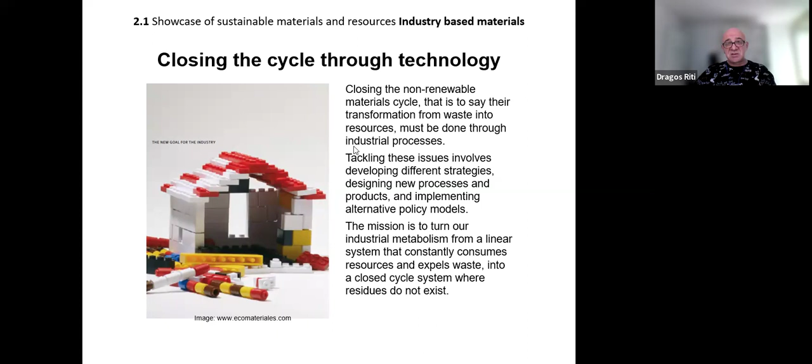Closing the non-renewable material cycle, that is to say, the transformation from waste into resources, must be done through industrial processes. Tackling these issues involves developing different strategies, designing new processes and products, and implementing alternative policy models. The mission is to turn our industrial metabolism from a linear system that constantly consumes resources and expels waste into a closed cycle system where residues do not exist. This is a very challenging task and goal.

The philosophy is to do only what is necessary. We were talking before about ceramic tiles and the impact on the environment, looking at the waste, water consumption, and energy consumption. A great deal of the ceramic tiles we use frequently offer more technical features than those we really need, either because operational conditions are not as severe as they're designed for, or because in some cases the material is prematurely replaced due to changes in fashion or owners' aesthetic preferences.

I'm not sure how many of you have changed the tiles in your bathroom when you bought a new apartment instead of keeping the old ones. Most commonly, when a building, like an office or industrial building, changes its owner, people tend to replace pretty much everything from systems to materials, tiles, wooden floors, etc. So this is a huge waste, and some of these materials are not at the end of their life cycle, and we're scrapping them.

But through correct design, the excesses of raw materials and energy consumption during manufacture could be avoided.

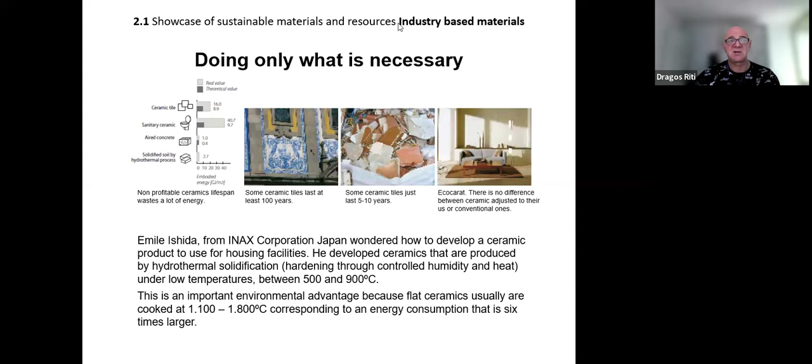Talking about doing what's only necessary, there's a Japanese researcher named Emile Ishida from the Japanese corporation Inax, who was wondering how to develop a ceramic product to use for housing facilities. So he developed ceramics produced by hydrothermal solidification, hardening through controlled humidity and heat under low temperatures between 500 and 900 centigrade. This is an important environmental advantage because flat ceramics are usually cooked at 1100 to 1800 centigrade, corresponding to an energy consumption that is 6 times larger. So he developed a method to produce tiles at a lower temperature, saving 6 times the energy.

And of course, we can close this cycle, this loop, by avoiding exploiting new mines. This means, for example, steel, like many other metals, has been recycled for decades. It is one of the few resources that regains its value during the whole building deconstruction process by simply sorting it out selectively. Fusion can take place an unlimited number of times without its quality being altered.

In fact, production energy can be reduced between 20 to 30% from the fourth recycling process onwards, compared to steel manufactured from iron, carbon, limestone, and a low proportion of scrap. Under certain circumstances, with dry construction and removable joints, 99 out of every 100 tons of steel in a building is likely to be recovered. That means obtaining 95 tons of new steel by means of the refusion process.

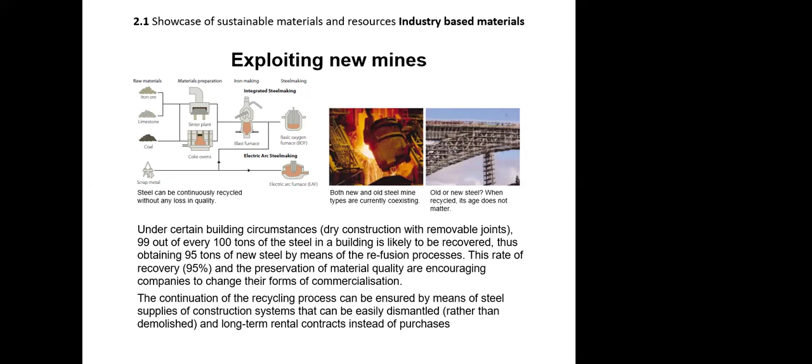This rate of recovery and the preservation of material quality are encouraging companies to change their form of commercialization. The continuation of the recycling process can be ensured by means of steel supplies and construction systems that can be easily dismantled rather than demolished, and long-term rental contracts instead of purchases.

Glass. Approximately 1.2 million tons of glass waste is generated in Europe in the construction industry every year. It is mostly not recycled due to problems in the separation process and technical difficulties caused by other materials adhering to the glass. On the other hand, 9.4 million tons of glass from bottles are collected by an immense network of municipal collection, all of which can be recycled.

These numbers have been compiled in 2010-12 in the EU. I think now it's a bit more than that, and the technology has advanced quite a bit. This kind of system has been implemented in many cities - a system of municipal collection which reduces new production and reintroduces recycled glass into the manufacturing of float glass for 25% of the construction industry. The quantity produced could be larger, but it's limited by a degree of purity required in this type of glass. The key to increasing glass recycling is waste management at the construction site, where a lot of material is available, and copying urban collection systems by separating it from other materials and collecting it in large volumes.

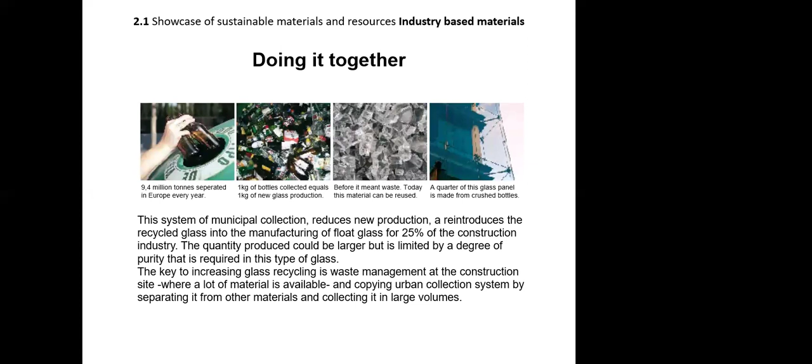Another material which has been recycled for many years, and is still developing new ways of recycling, is plastic. In the production of plastic materials, petrol - a resource which must be remembered is depleting - is doubly used: as a source of energy to produce plastic, but also as a raw material. The possibilities of reusing and recycling plastics depend on complex technical factors. Most plastics can be recycled, although two important obstacles must be avoided: the low purity of the resource and the availability of a sufficient amount of each type of compound.

The industry shows how good quality products can be made from plastic waste. A good example are the panels and boards manufactured out of all sorts of plastics coming from municipal waste collection, which are ground and pressed, free of glue or adhesive, and very resistant to changes in humidity. Another example is the acoustic board produced from the agglomeration of diverse polyurethane foam particles, a compound with really high acoustic absorption capacity for all sound frequencies. In both cases, they are 100% recycled and can be used within and outside of the construction industry, and can again afterwards be completely ground up and pressed again and reused.

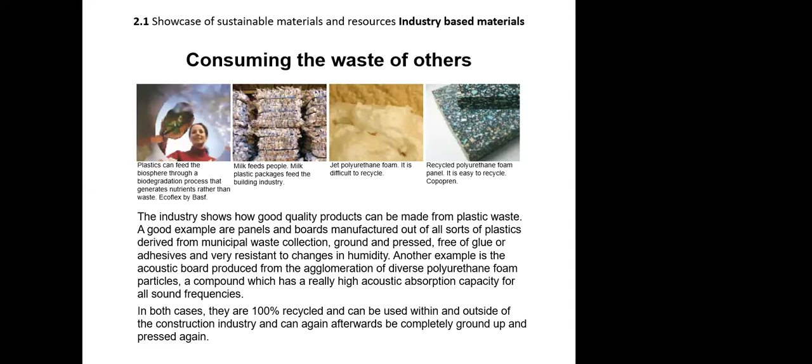We were talking earlier about concrete, and this is the invitation of not only concrete, but in general, consuming our own waste. Approximately 60% of the weight of a concrete structure building is made up of crushed natural stone. These are fragments of natural stone extracted from quarries whose technical characteristics are very similar to the products obtained after grinding concrete itself. So under certain technical and regulatory conditions, a large amount of this natural stone granules can be replaced by a new material that until quite recently was regarded simply as waste.

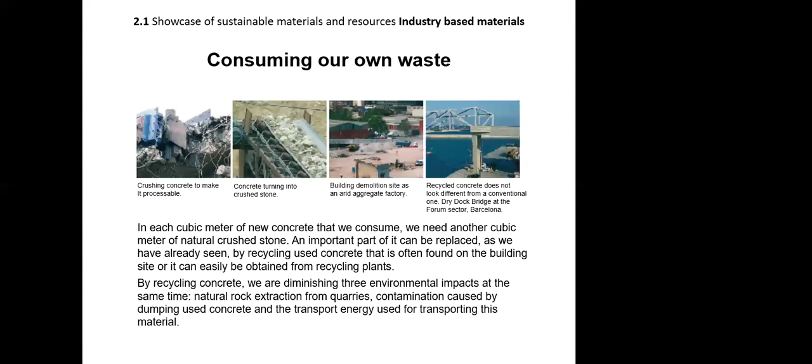And this is concrete. In each cubic meter of new concrete that we consume, we need another cubic meter of natural crushed stone, and an important part of it can be replaced by recycling used concrete that is often found on the building site, or easily obtained from recycling plants. By recycling concrete, we're diminishing three environmental impacts at the same time: natural rock extraction from quarries, contamination caused by dumping used concrete, and the transport energy used for transporting these materials. And now there's a lot of equipment that is crushing and recycling concrete and sending it to concrete manufacturers.

And of course there's also this philosophy we can look at, doing more with less. From the environmental point of view, there is no better material than that which we have avoided to use. By diminishing material consumption, both raw materials and energy are saved. There is less pollution and consequently fewer things that need to be recycled. As I said before, the design has a lot to do with the optimization of the use of materials, and a lot of typical construction products and systems could be made lighter. By using products with a minimal amount of materials, both raw material extraction and energy consumption is reduced. In addition, by selecting new and improved products, we are also supporting industries that strive to improve the environmental performance of their product.

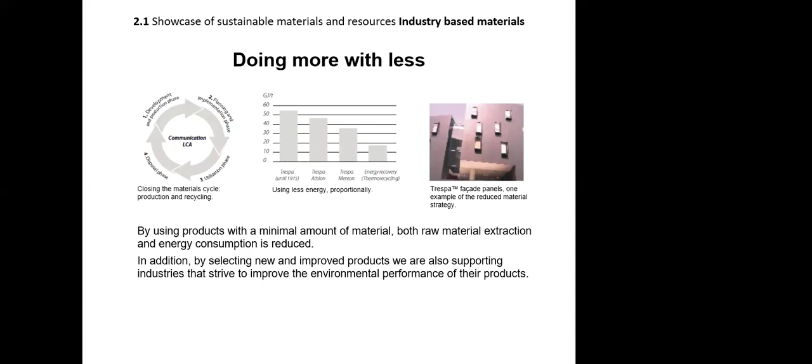Another place to look, as I said earlier, is extending the lifespan of materials. Aluminium is typically known as a material with poor environmental properties. Nevertheless, aluminium has two important advantages: its recyclability and durability. Its durability maximizes its use, and its high recyclability reduces the environmental impact by 90%. These characteristics minimize environmental impacts enormously in comparison to other materials with similar use. Aluminum pieces can be melted and reused practically as many times as desired without any noticeable loss of quality.

Though many people are not aware, there are products made with 100% recycled aluminum - we cannot tell the difference. Aluminum durability in external applications such as curtain wall frames is estimated to last approximately 50 years without maintenance, repair, or substitution requirements.

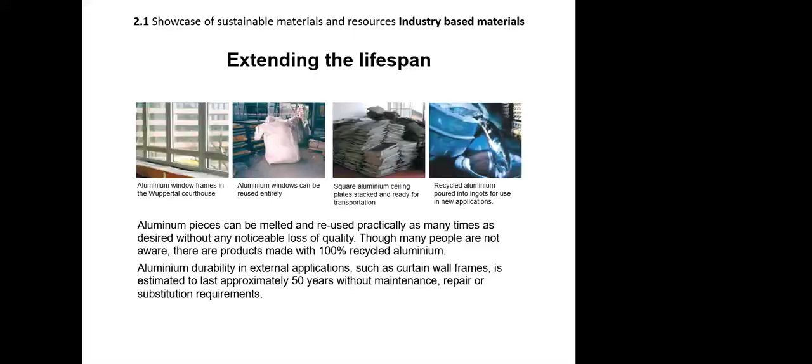The task of this new industry, through new demands of sustainability, is to recycle non-renewable materials by imitating the great biospheric machine from the natural world and avoiding waste deposit and their associated environmental problems. The ways to achieve this are already becoming evident in numerous products that we use in the building construction industry, and new models that we will have to follow in the future to close the materials cycle.

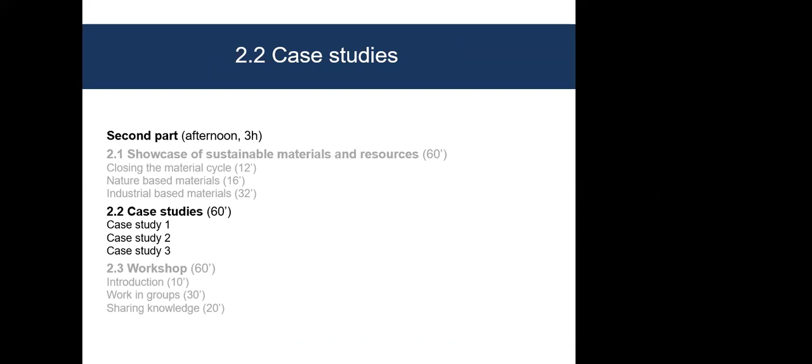So I think we are coming to the end of this presentation, or what was mostly needed to be covered, and I think we handled it pretty well. There are a few case studies in this presentation showing how reconsidering a neighborhood, the way to build housings in a neighborhood, and how to use landscaping in a neighborhood, has brought a significantly lower impact on the environment. You will have in this presentation 3 study cases.

This one is, in my opinion, one of the most important and which has the most impact on the environment, not only at a local, individual level, but also at the community level. This is the analysis of 60 apartments which were to be built in a new social housing complex.

The municipality was looking at how to reduce CO2 emissions while keeping the same cost of the building, or not increasing it more than 5%, but giving a huge reduction in CO2 emissions and the same quality of life to people living there. I won't get into this because we're out of time, but you'll have it in the presentation. You can look at how the local council has been looking at implementing an approach to diminish impact. It started from urban planners analyzing materials, the way of designing them, positioning the buildings, and what kind of materials to use.

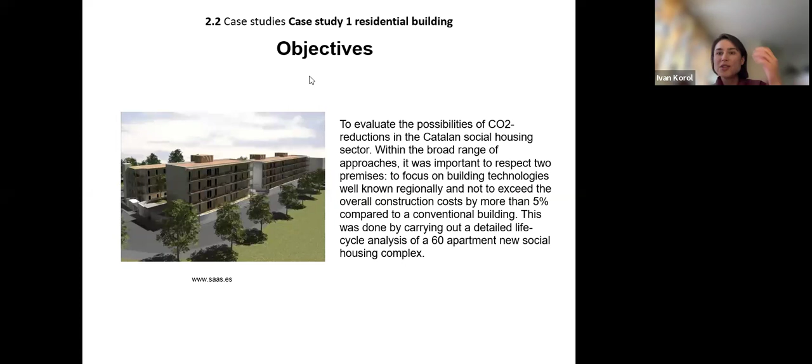One more example from my life: my grandma has an aluminium roof, and she said it's for her whole life and for her grandkids' life. My parents have a metal roof, and they say it's more modern and the colors are nice. In Norway and Sweden, I saw old houses with roofs covered in moss and grass. Did you see this? Comparing all these roofs, what's your opinion? What type of roof is more ecological and attractive?

Thank you for the question, it's a very good one. Well, it depends on where we're building these houses. If I'm building a house in a mountain area with mainly rocks, I cannot put grass and land on it, so I need to find a different roofing system for that.

What I can put on my roof can be either wood, sheets of wood which can also be isolating, or sheets of stone, but that's specific to the region where we're building. Of course, grass and land are the perfect solution from an ecological and insulating point of view, but we cannot use that everywhere.

In very hot areas, for example, you cannot use this kind of insulation because it will cost more to maintain than a metal roof or a different sheet roof. So it's important to adapt the solution locally to where you develop the project. It's not that one is better than the other, it's about what's really needed in the area.